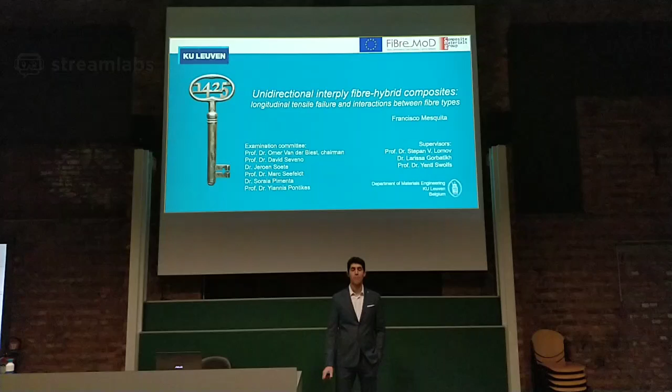But then he has to discuss about it. Yeah, but it also makes sense, because people come from different areas. You also have these clusters.

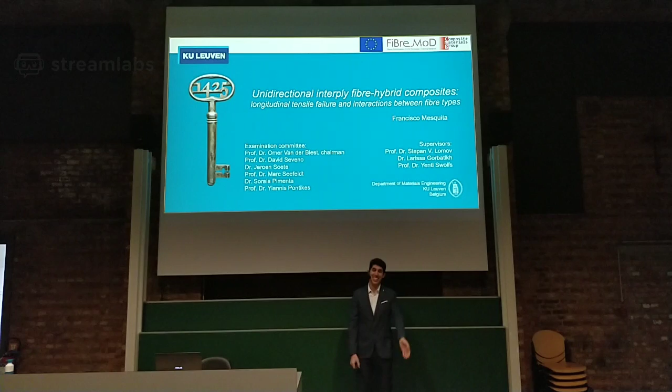Hola. Hola. Hola. Hola, we hear more of Georgia than of... Hola, Zulmira.

Because I have the video on. That's why you hear yourself.

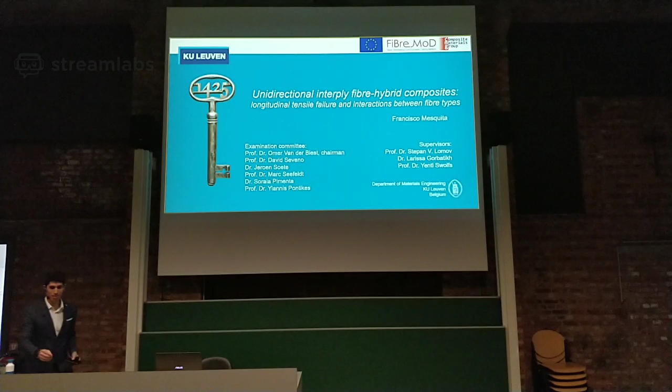What should I connect with now? No, wait.

You want to ask questions now? Did you have a lot of writing on the slides? Because I really can't read it very much. No, it's mainly images, she was in the presentation before, we said it's mainly images.

Sorry, I don't want to know what they are saying. But I imagine people are very funny.

They're complaining because they cannot wear the gowns. No, there are no gowns. People wearing the same gown. Yeah.

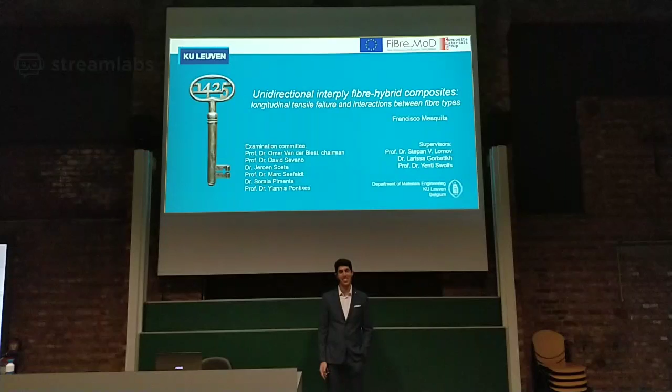I think they are coming. Yes, they are coming.

The university says 1.5 meters. I feel okay.

Maybe my friends over there can go a bit up so that there is a second row. Or we have enough space today. Okay.

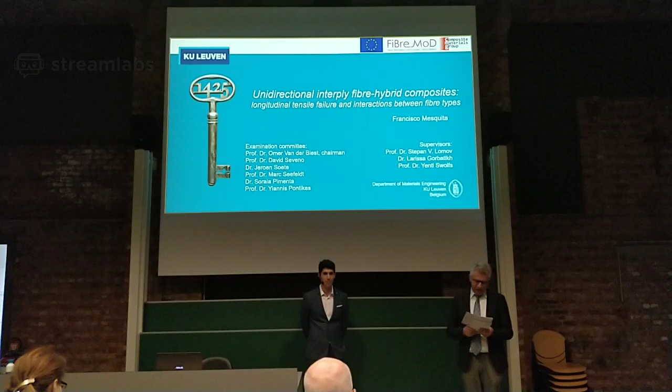I will start by explaining my thesis, but before I dive into the thesis itself, I just want to break down the words in the title: things like what are composites, unidirectional composites, interply fiber hybrids, longitudinal tensile failure, and also interactions between fiber types.

Let's start with composites. Where have you seen composites? Among other things, you've probably seen some of these wind turbines. Wind turbines actually only work if they're made of composites. If they're not, they're actually not economically viable.

Another application you may have seen on the road is the BMW i3, an electric car. This is the chassis of the BMW i3, and two people can lift it. This is only possible because it's made of carbon fiber composite. Then there are applications for sports, like bicycles made of carbon fibers, and for defense, like Kevlar vests, which are made of aramid fibers.

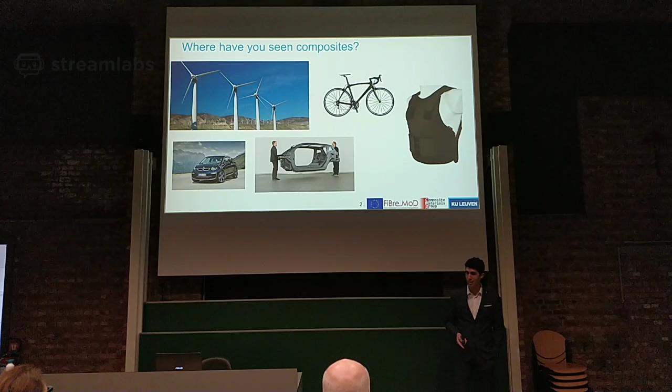But what are composite materials? Well, there are other kinds of composite materials, like concrete, or metals and ceramic composites, but here I'm going to speak about fibers and plastic. So if you take fibers and add a plastic matrix, and put everything together, there you go—you have a composite material.

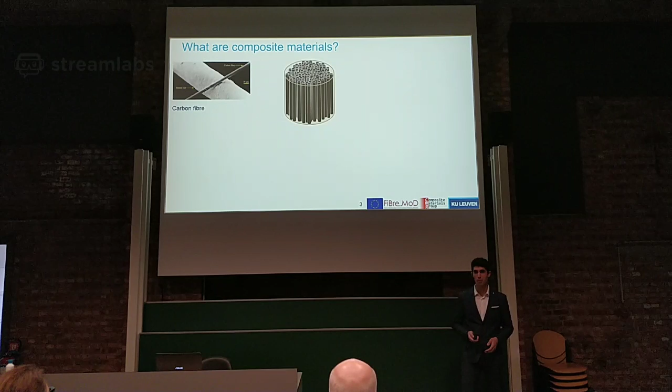Now, which kind of fibers? One of the most common types used in composites is carbon fiber, and this is the most classical image you'll ever see of it. The big thing is a human hair, and the small fiber is a carbon fiber, which is 7 micrometers in diameter. But there are also other kinds, like glass fibers or natural fibers such as flax or bamboo, which come directly from plants. So if you want a more biosustainable composite, you can use flax fibers.

And then, which kind of plastics? For example, one of the most structural resins that exists is epoxy—maybe you've seen these kinds of tables in social media or YouTube where they make beautiful rivers. But the most common things you may have seen are polypropylene bottles or polyethylene bags. So basically, if we mix the fibers with these plastics, we can get a composite material.

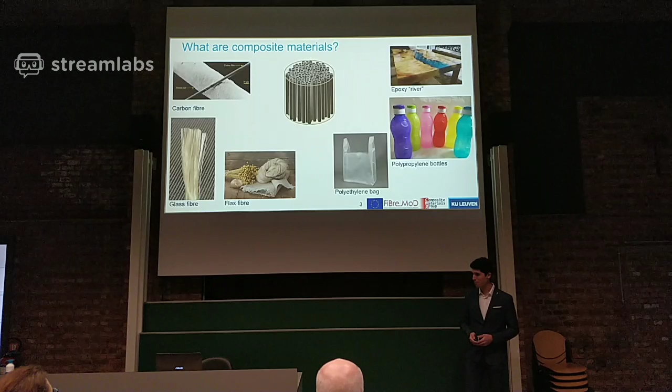Now, why do we use composites? That's what I'm trying to convince you here. If we take 7 grams worth of composite, 10 centimeters long, hold it on one side and attach 5.5 tons to it, it will deform only 1 millimeter. Of course, you can do this with other materials, such as steel, but in that case you need 20 grams, which is 3 times heavier than carbon fiber composites.

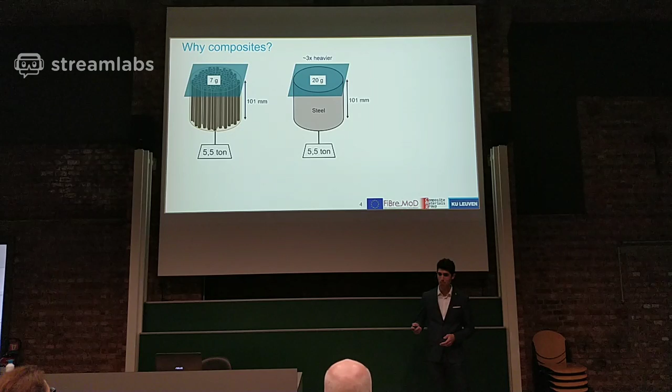So which kinds of architectures can we have in composite materials? Unidirectional composites, as in my title, are composites where all the fibers are aligned in one direction. But these are not the only kind we can have, because fibers can be oriented in multiple directions, giving a multi-directional composite. For example, the one I'm assembling here is a quasi-isotropic composite, which has almost the same properties in all directions.

But we don't have to add layers to make multi-directional composites—we can have one layer with fibers in both directions, and these are the textiles, where we can have woven, braided, or knitted composites. These are fibers arranged like our clothes, in a textile, and then we add a matrix to get a textile composite.

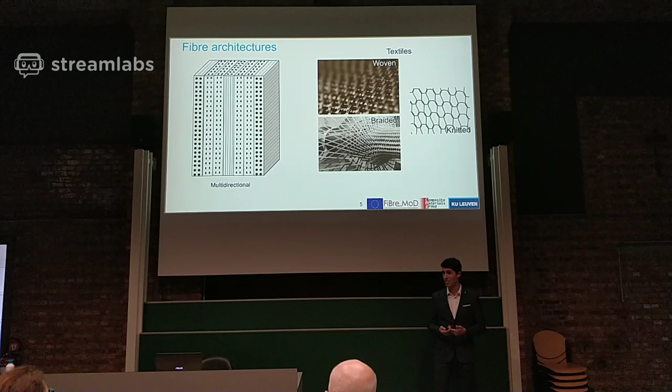Now, I'm focusing here on unidirectional composites, because in any kind of composite, the fibers that trigger the final failure in tension are the ones oriented with the loading direction. If we look at how a unidirectional composite fails—here we are loading a carbon fiber composite in tension—it will fail very explosively, very brittly, and without much warning. What's actually happening inside as we load it is that fiber breaks accumulate inside the composite, and this triggers the final failure.

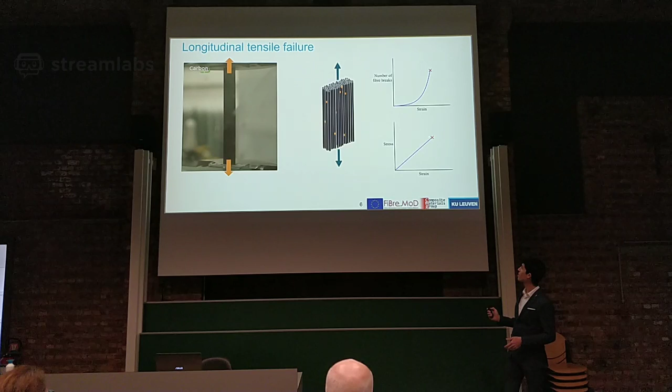Fiber breaks will start accumulating more rapidly, and at some point the composite will fail. This will also determine the stress strain diagram, which is the way we characterize materials. If we have the stiffness, which is the slope of this line, then we can also know the strength and the failure strain, and this can characterize our material very well.

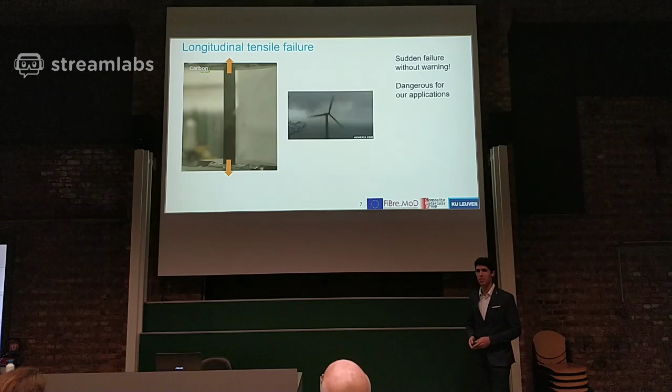Now let me give you another application where this sudden failure happens. You may have seen this before, where a wind turbine blade fails explosively without any warning. As you can imagine, this is quite dangerous for applications. So in order to avoid this, we should be able to predict better when it's going to happen, and on top of that, I would suggest adding some more safety to it.

For this, we can use hybrid composites. With hybrid composites, you actually get this pattern, which is the carbon fiber ply failing, and this pattern can serve as a warning to the final failure of the composite. So before we get something explosive like we saw here, we can actually get this nice pattern instead.

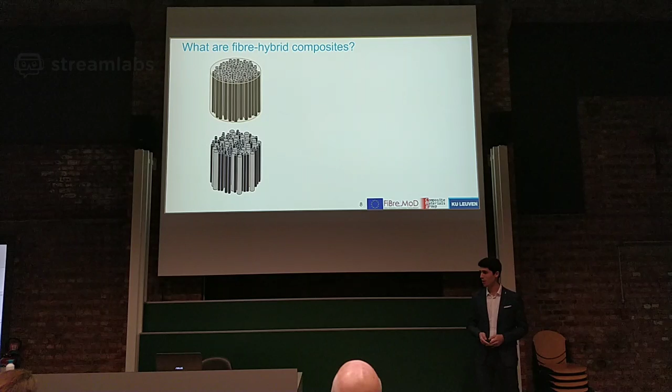But what are these hybrid composites? As I said before, if we add fibers to a matrix, then we get a composite material. But if we have at least two fiber types, normally a low elongation and a high elongation fiber, because one is more brittle and one is more ductile, and we add a matrix to it, there you go, we have a fiber hybrid composite.

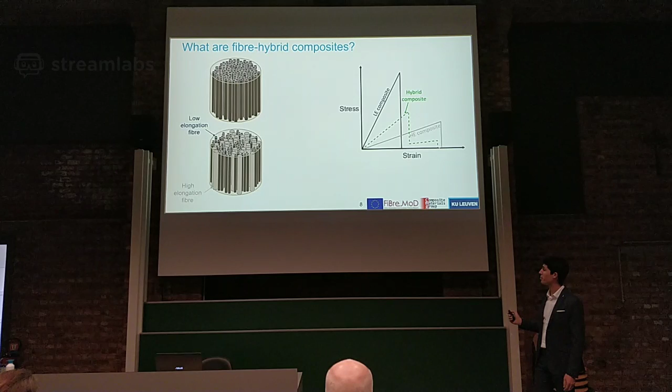The way this works is that if we look at the stress strain diagram of the hybrid composites, the low elongation composite is stiffer but also more brittle, and the high elongation composite is more compliant but also more ductile. What we get in a hybrid composite is something in the middle. So we get the failure of the low elongation fibers here, but then the composite is still able to carry load up to the failure of the high elongation fibers.

Which kinds of hybrid composites are there? The one I showed you before, also shown in this image, is an intra-yarn hybrid composite, where all the fibers are mixed very well, very closely, in the same bundle. But we can also mix them in bundles in the same layer, so the fibers are dispersed in bundles. Or lastly, we can have interply hybrid composites, in which each ply corresponds to one fiber type.

Now, I've decided to focus in my thesis on this type of hybrid composite because it's easier to manufacture. You just put different layers of different materials on top of each other, and there you go, you get an interply hybrid composite. Since this is so easy to manufacture, it's quite relevant for industrial applications.

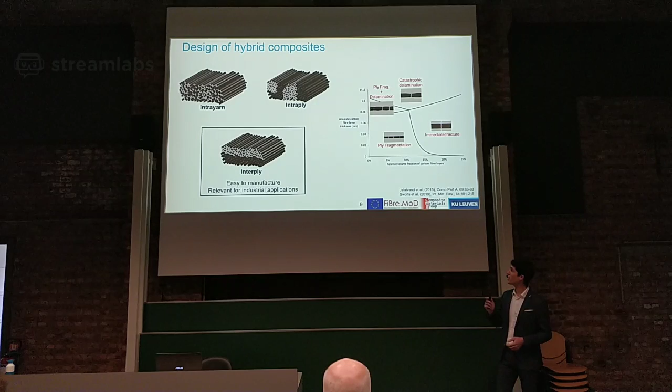Another reason is that if we look at this diagram, we can actually obtain different failure mechanisms just by combining different fractions and thicknesses of materials. Looking further, what we see here is the relative fraction of carbon fibers on the horizontal axis and the thickness of the carbon layer on the vertical axis.

With this image, we can see that by changing the configuration of our hybrid composite, we can obtain ply fragmentation, which is the failure mode you saw before in the video. Or, if you have too much carbon fiber, you can get immediate fracture because everything fails at the same time and the glass fibers cannot sustain the loads. But if the carbon ply is quite thick, then the plies will detach from each other.

If you look closely at this diagram, you'll realize that as we go right on the horizontal axis, we are adding more carbon fibers and less glass, making the composite stiffer. And going down on the vertical axis, we are decreasing the thickness of the layers, making the composite lighter. So we want to push against this line to optimize the performance of our hybrid composite, but we don't want to go over it, otherwise we enter the region of immediate fracture, and that's not good. So what we want is to predict the longitudinal tensile failure of fiber hybrid composites, so we can go very close to that line but not go over it.

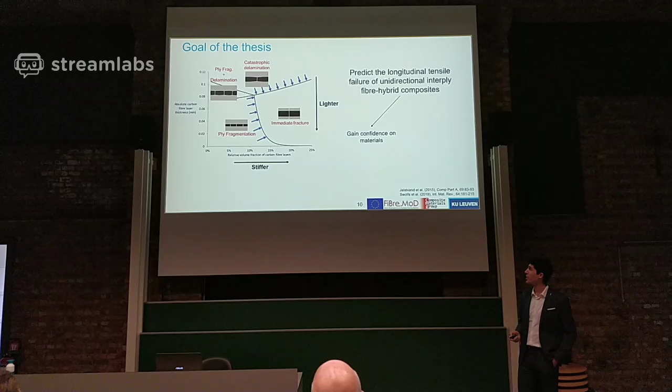By doing this, we can gain confidence in the materials. But I don't only want to do that - I also want to connect the micro-level fiber and matrix properties to the meso-level failure modes of ply fragmentation, immediate fracture, and delamination.

So let's establish a roadmap. The goal is to develop a model. As I told you before, when we load the composite in tension, what we start to get here are fiber breaks. So in order to predict these fiber breaks, the first thing we need to know is how to get the fiber properties.

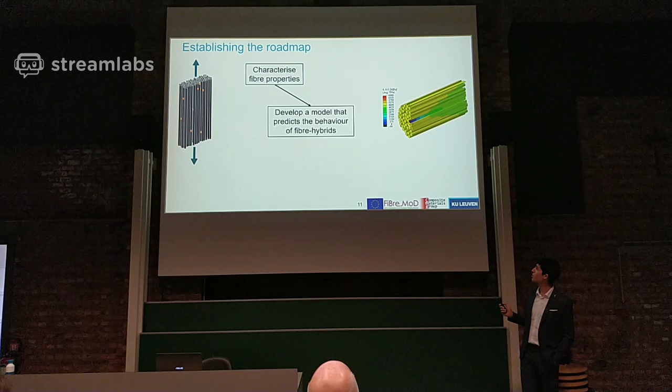So let's start by characterizing the fiber properties. One thing I didn't tell you is that apart from fiber breaks happening just because of the fiber strength itself, they also happen because when fiber breaks occur, they create stress concentrations around them. So other fibers carry extra loads, and we need to understand how that happens—like the broken fiber in the middle here, with the surrounding fibers having stress concentrations. So the second step is to understand how these stress concentrations occur.

Finally, our model is not really useful if we have not validated it against experimental results. So the final step in this research is to validate the model. I want to do this not only against the stress-strain behavior, which is a global behavior, but also look inside the composite and compare the damage mechanisms occurring inside.

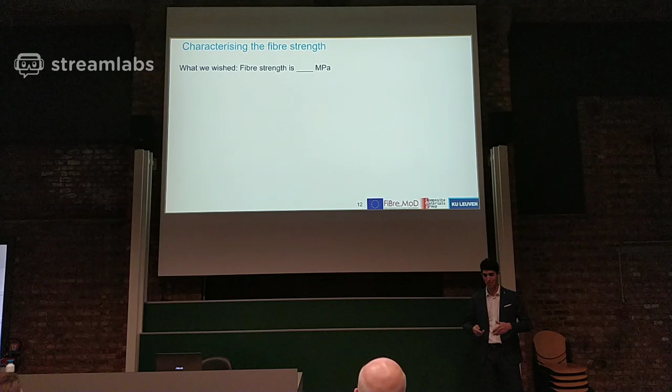Starting with the characterization of fiber properties, what we would wish is that the fiber strength is a single value—let's say 10, 100, 1000, 10,000 megapascal. But in reality it's not like this. Fiber strength is stochastic, meaning it's random but obeys a probability distribution.

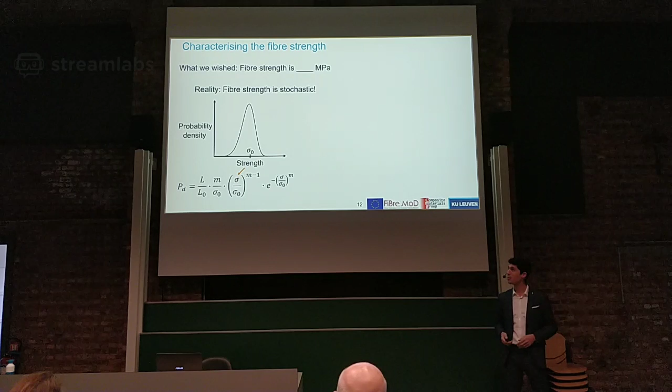This distribution is characterized by an equation—I know you don't like equations much, but simply, this is the strength, our independent variable on the x-axis, and sigma 0 is the scale parameter. It represents the value at 63% probability of the probability density distribution. So if you change this, you move the probability distribution left or right. Then you have the modulus, which controls the variability—higher modulus means less variability in the fiber strength.

Fiber strength is stochastic because it's determined by defects inside the fiber. Due to manufacturing, there are very small defects at the nano or micro level, and these determine the failure of the fiber. That's why we have a probability distribution. If we make the fiber longer, it's more likely there's a defect inside that will trigger its failure—so this also depends on the fiber length.

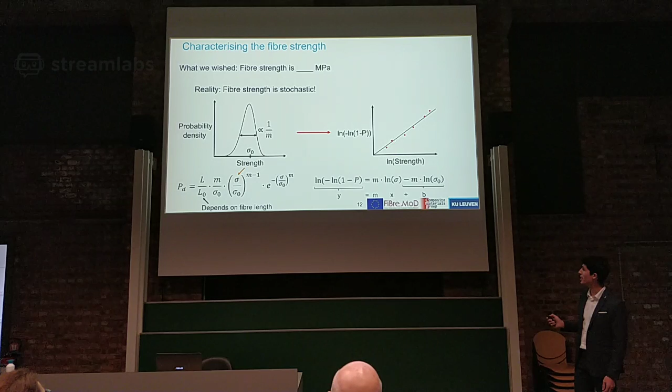If you do some mathematical arrangement and apply logarithms, we can convert this probability distribution into a line. We characterize this by plotting data points. I removed the length parameter because normally we do this for one specific length. If this equation seems complicated, it's actually just a line equation, y equals mx plus b. Once we have these data points, it's quite simple. The problem is getting these data points.

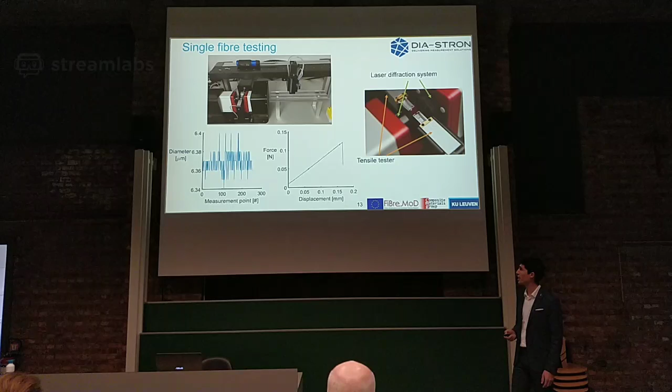So let's do that. What I did here was partner with Dia-Stron, who have automated single fiber testing machines. This is the core of the equipment, where they have a laser diffraction system to measure the fiber diameter at multiple points, and averaging this gives a very reliable measurement of the fiber diameter. They also have a tensile tester, which gives us the force and displacement diagram, and with some data processing we get the strength and stiffness of the fiber.

Now stiffness isn't a unique parameter in carbon fibers because they actually stiffen with applied strain. If you measure stiffness between 0.1% and 0.3% strain, you get a certain value, but if we move that range further and further, we can measure stiffness as a function of applied strain. When we do this, we get a diagram we can fit a line to, giving us the gradient of stiffness—how much stiffness increases with applied strain—and the initial stiffness, or at least an approximation of it.

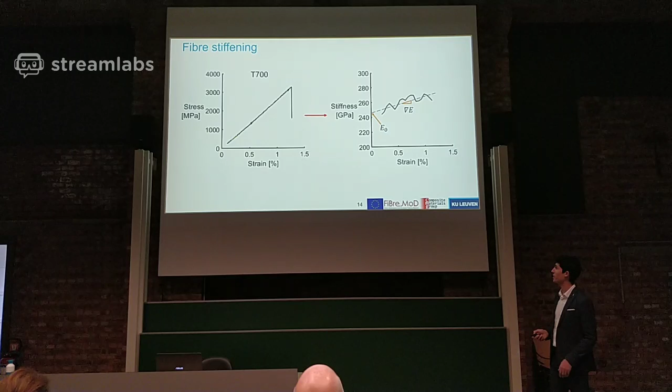I did this since I'm talking about hybrid composites, so I'm not going to do this just for one fiber type. I actually tested 5 different fiber types: 4 of them are carbon fibers, and 1 is glass.

The reason I did this is because 2 of the fibers, the T700 and 34700, have the same stiffness and tensile strength according to the manufacturer. I wanted to compare these 2 fiber types, see how their probability distributions look, and understand how this may influence composite properties. Then I also tested the T300, which had similar stiffness to the previous 2, but a lower strength. Let's see how that influences the Weibull parameters.

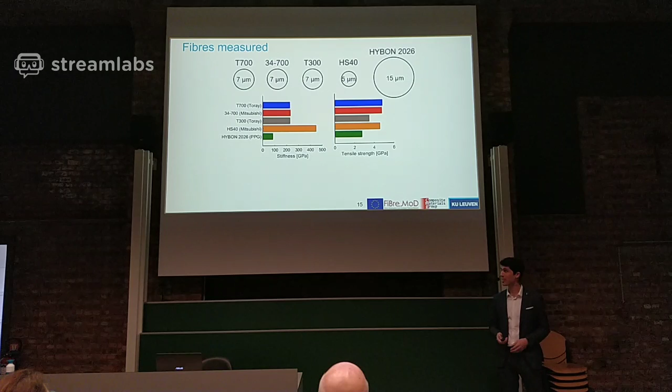And the HS40 fiber, which has almost twice the stiffness, but the same tensile strength. Since most of my hybrid composites will be with carbon and glass, I also tested this glass fiber, which has lower stiffness than the carbon fibers, but not so different strength because it's also more ductile.

And then I did a very high number of tests. If you add all of these up, it gets to almost 700 single fiber tests. That's 700 times putting fibers in a cassette, plus extras for calibration, which I'm not even counting here. So first, let's look at the fiber stiffness and stiffening of the carbon fibers.

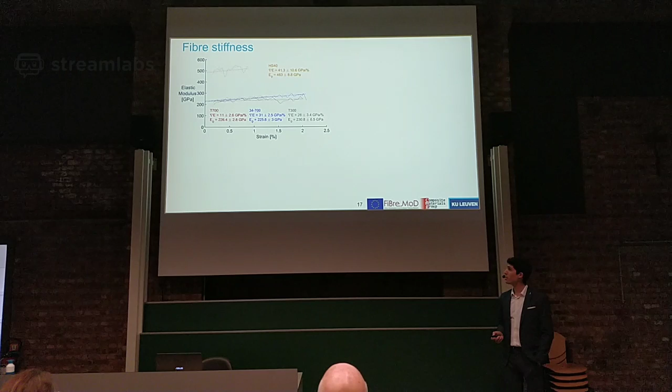When we look at the HS40 fiber, yes, it stiffens a bit faster than the others, but the most unexpected result is that its initial stiffness was too high compared to the datasheet value from the manufacturer, and we were not expecting this.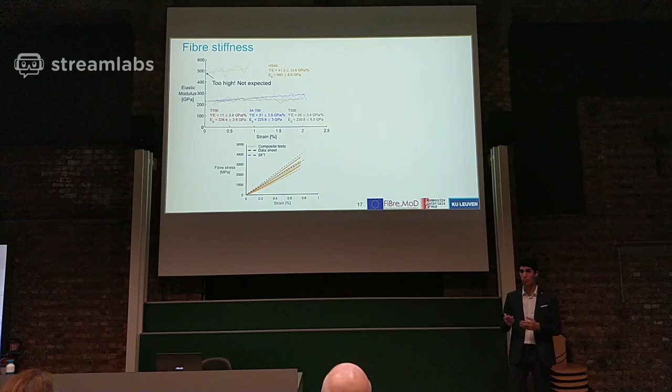But fibers in composites are not always perfectly aligned with the loading direction. They have some misalignment, some waviness, some angle relative to the loading direction. So it's possible that the value we measure with a single fiber test is a bit higher than the value obtained through composite tests, and that this is actually real, because with some misalignment, the stiffness measured from the composite is a bit lower. It seems that when the manufacturer measured stiffness, they measured it like we did with composite tests, obtaining a certain value, but the real stiffness of the fiber is a bit higher.

When we look at the glass fibers, we find something remarkable. Although the carbon fibers stiffen with applied strain, the opposite happens with the glass fibers — the stiffness actually decreases with applied strain. This is remarkable and has not been observed yet in the literature. We think, although we're not 100% sure, that it's because the silicon and oxygen atoms in the glass fiber get a bit further apart as we stretch the fiber, which reduces the bond energy and therefore the stiffness decreases. Again, to be confirmed — we're not sure, but it's our hypothesis.

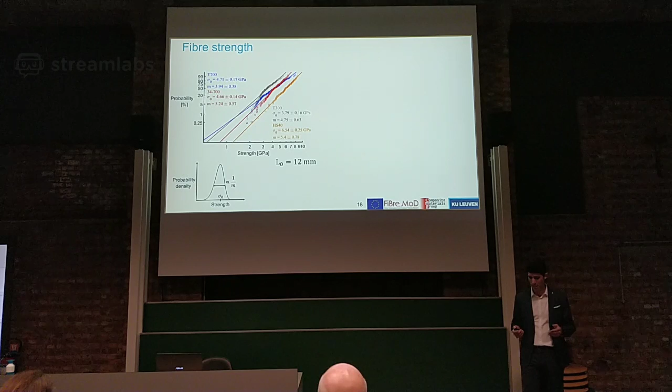Then, looking at strength, the most important comparison was between the T700 and 34700 fibers — the blue and red lines here. As you see, the sigma zero, the scale parameter, is quite similar between the two fibers, but the modulus is not the same. This means the variability of strength is not the same between the T700 and the 34700, and this may have consequences for the composite properties.

Now, when I said that we needed a lot of tests to properly characterize the Weibull parameters, I didn't tell you how many.

It's very difficult to say how many tests we need exactly. But what I did here was take a sample, for example, of 50 points out of my 217 data points for the T700 carbon fiber, and for each set of 50 fibers, I fitted Weibull parameters.

If we do this enough number of times, we can fit an ellipse to encase all these estimations. If we have a low number of fibers, we get a very big scatter in the parameters, but as we increase the number of fibers in our sample, this ellipse shrinks until we get a focal point, which is the value I obtained with the 200 tests.

So this is to say that we should not use only 50 tests to characterize the fiber strength, at least for the T700, because we get a very big scatter on the parameters. I cannot say how many we need, but definitely a very high number.

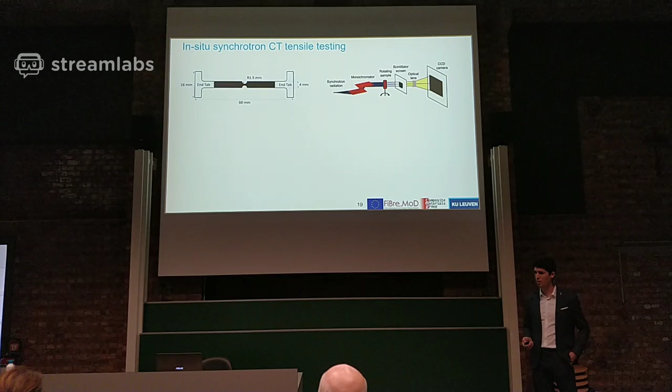We scanned the notch region, where the composite will fail and accumulate more fiber breaks, and we were looking for the fiber breaks. Doing this, we can correlate the stress applied in the composite with the accumulation of fiber breaks, and we can separate the fiber breaks that happen only due to the strength of the fiber from the ones that occur due to stress concentrations.

So when we do this, we can estimate the Weibull parameters using a virtual bundle with assumed Weibull parameters. Before we compare with a single fiber test, which is our benchmark, I need to scale the Weibull parameters estimated through the composite that we imaged, only 1.7 millimeters, up to the length of the fibers in the single fiber test, which was 12 millimeters.

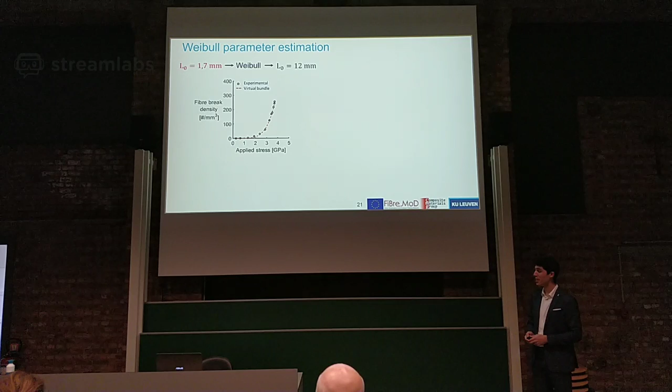When we compare for the T700 carbon fiber, we see that the estimation using the CT actually gives us quite decent estimations. For one specimen, it was quite spot on. For the other one, slightly lower, but still within the scatter.

But when we look at the estimation for the glass fibers, this didn't go so well. I think the problem is not the method itself, it was the specimens that we had with this fiber type. Since glass fibers are a bit bigger, we had fewer of these fibers in our composite, and therefore we didn't have enough statistical power to properly predict the parameters.

So next time, and I hope we can do this later in the year, we'll take bigger samples and be able to check whether this is a problem or not. So, we finally managed to characterize the fiber properties. Let's go to the second part and try to understand stress concentrations.

So what are stress concentrations, and are they important? Let me show you this image where we have 4 states in our composite. An initial state where all fibers are intact, and if we apply a load, all the fibers are carrying the same load. But at some point, due to the stochastic nature of fiber strength, one of the fibers will break.

When this happens, due to the matrix, the fiber will still recover its stress a bit farther away, but the fibers nearby will have to take over the stresses that the broken fiber was carrying before. So these nearby fibers are more likely to fail. If we increase the strain a bit, or even just like that, nearby fibers can fail just because of these stress concentrations. This will accelerate the process of composite failure and lead to final failure.

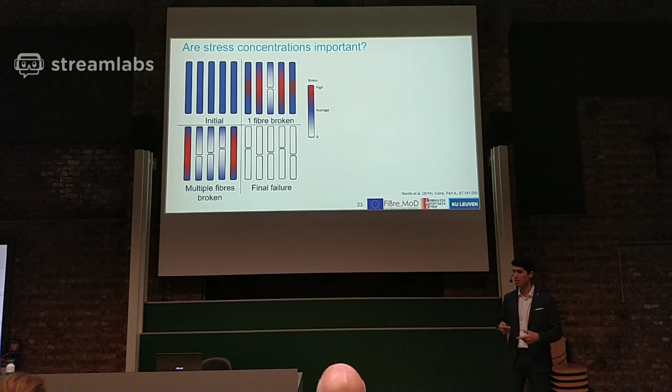Now in hybrid composites, as I've shown you before, we have different failure mechanisms such as ply fractures or catastrophic delamination. So we're not only interested in stress concentrations due to fiber breaks, but also due to ply fractures. I'm going to investigate stress concentrations due to fiber breaks, but also at the higher level with ply fractures and some delamination.

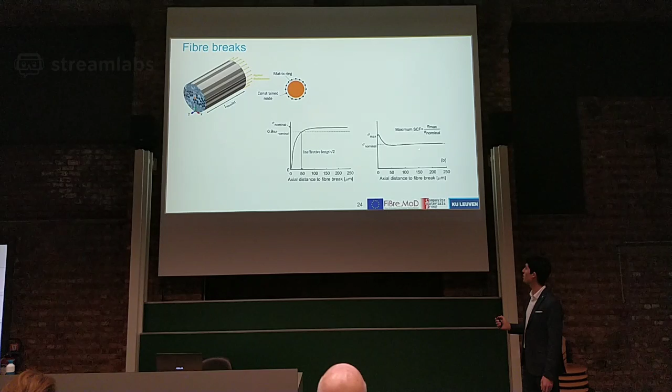But I tried something else. I looked at the local arrangement of the fibers and tried to look at the local volume fraction. This local volume fraction is basically the distance between the broken fiber, the reference fiber, and the fibers nearby.

Here, indeed, I found a very big correlation between the ineffective length and the local volume fraction, which means that this local volume fraction affects the ineffective length and the stress recovery of the broken fibers much more than the distance to the ply interface.

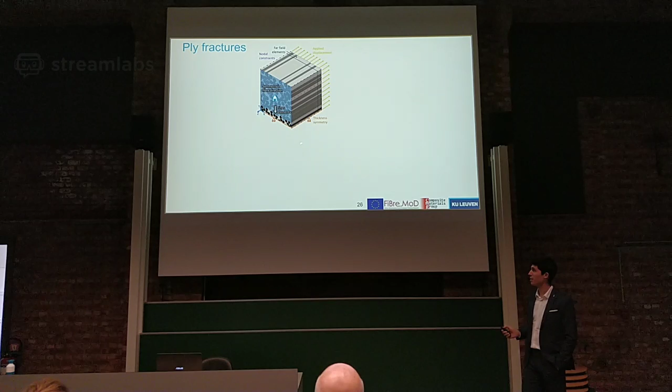Looking at the higher level ply fractures, I created a new model, and it works more or less the same as the previous one, where we apply displacement on one side, but in this case we hold only the intact layer, and we release the broken layer. So this broken layer will be simulated here.

I did this for three different composites with varying thicknesses of the broken layer. When I looked at the ineffective length, I found that it depends very much on the thickness of the broken layer, and that the ineffective length is much higher in the ply fractures compared to the single fiber breaks, which is this smaller value over there.

This means that the stress recovery in the ply fractures occurs at a much larger scale compared to the single fiber breaks. Looking at the maximum stress concentrations, again, stress concentrations due to ply fractures are much higher compared to single fiber breaks, and they also depend on the thickness of the broken layer.

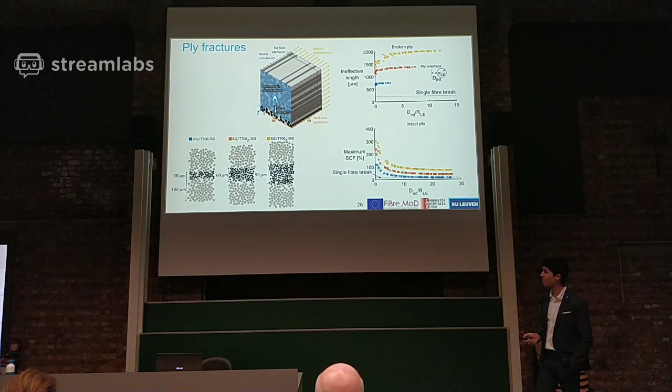Finally, I also looked at the delamination. Delamination, by the way, is when you have a ply fracture, so the ply fails in the middle, and then the layers debond from each other.

I created this model which has exactly that property. So again, we hold the intact layer, we apply displacement on the other side, but now this face, the red face over there, can slide, so the layers can slide on each other.

I ran some simulations with three different delamination lengths, and I wanted to see what is the effect of the delamination length on these stress concentrations. Looking at that fiber, which is close to the ply interface, what we observe here is that the maximum stress concentration actually decreases as the delamination length increases.

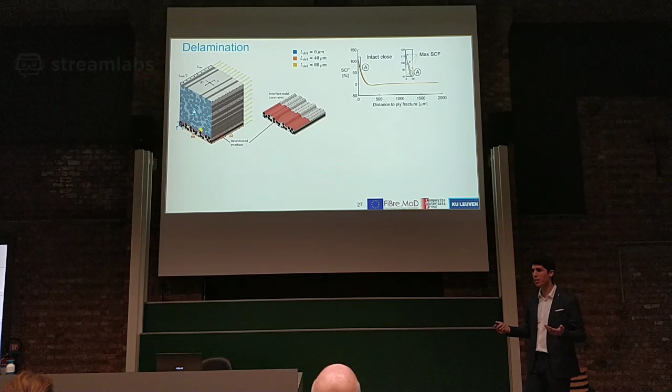This is not really because the fiber is less affected, but it's because the stress concentrations become more uniform through the thickness. If we look at the fiber that is a bit farther away, the opposite happens: it has a higher maximum stress concentration that is increasing with the delamination length.

Okay, so two steps are done. We characterized the fiber properties and understood something about stress concentrations. So let's start developing our model.

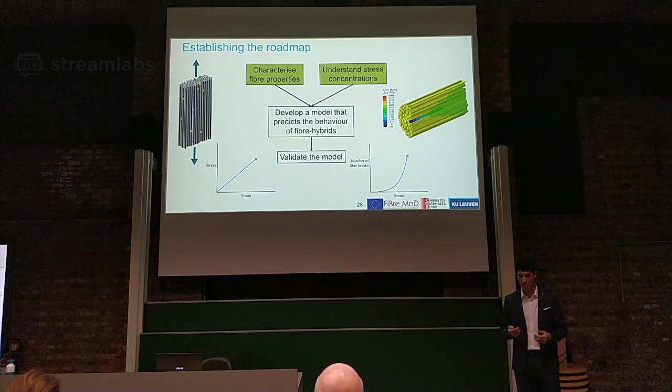The way this model works is that we have all the fibers parallel to each other and with the loading direction. In order to take into account the stochastic fiber strength, we divide each fiber into small elements like that, so each element will have a random strength according to the Weibull distributions.

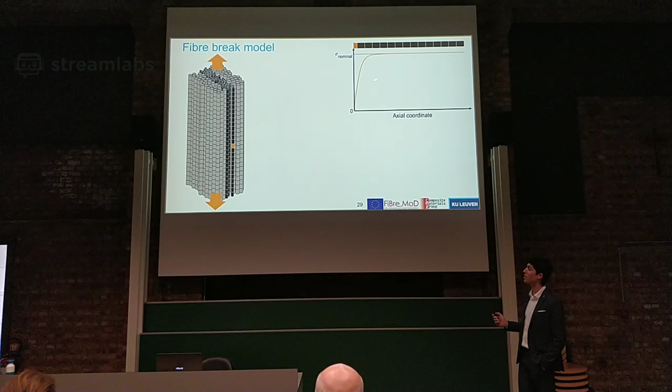When we start applying load, we see that at some point we will have fiber breaks, because the weakest fiber of all will start failing. To this fiber we'll apply a stress recovery profile as obtained from the finite element models.

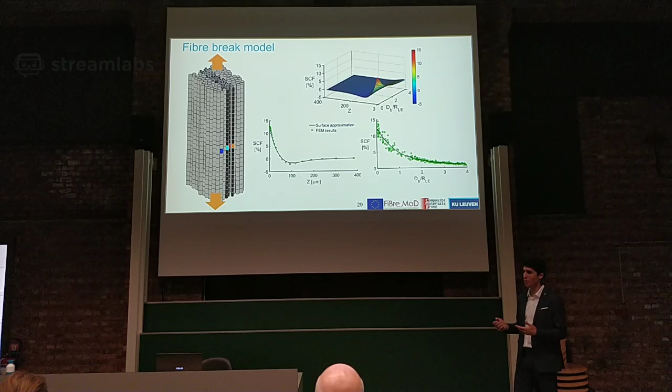Now, the fibers that are nearby will have stress concentrations, and the way we take this into account is that we get the data from the finite element models and pass it through this surface approximation, which has dimensions in the radial direction, so distance from fiber to fiber, but also in the axial direction, distance along the fiber. Using the data from the finite element model, we get this surface approximation where we find the average stress concentration. We don't take into account the big scatter, we just follow the average value, because we don't know well enough how to predict this scatter yet.

So allow me to rotate this model for you and remove these glass layers, because I want to show you how we model ply fracture.

Fiber breaks will start accumulating, but at some point this ply will fracture. Let's consider that we are at that stage and we have one fiber break. But due to the stress concentrations only, without increasing the strain, these two fibers that have the stress concentrations can fail. So in the second iteration, we get three fiber breaks.

Now the stress concentrations are even higher, so in the third iteration we get more and more fiber breaks. At this point, we can say the number of fiber breaks is increasing rapidly enough for us to say this ply will fracture there.

But we don't want to continue the model to calculate which fibers will fail next based on the stress concentrations. We want to actually predict this, because that is much more computationally cheap. So we look into the elements of the fibers that are not broken yet, and we calculate this failure index, which is basically the stress applied over the strength.

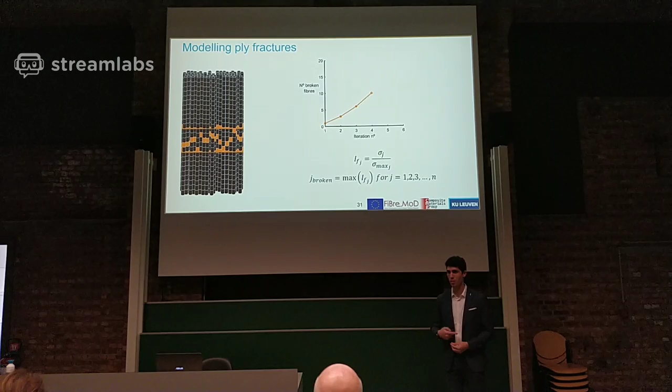This gives us the probability of each fiber element to break, and the one that breaks is the one with the maximum failure index. So we can calculate the morphology of this ply fracture without letting the model continue and consume computational resources.

So if we look at the influence of the Weibull parameters of the S-glass fibers on the composite properties, I did this for two stacking sequences. I maintained the parameters of the carbon fibers and changed the Weibull scale parameter of the glass fibers. When I did this, I was able to change the failure mechanism.

Which failure mechanism? Let me remind you. If we apply tension and everything fails immediately, we get immediate fracture. If when the glass ply fails we already have some fractures, we can call it multiple fracture. But if we're at the point that the carbon ply has so many fractures that it cannot fracture again...

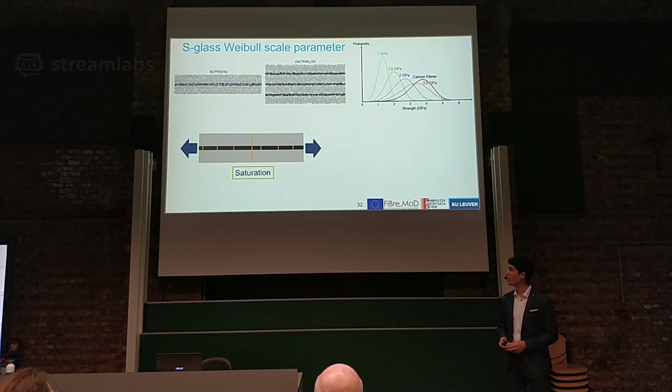...then we call this saturation. For the other kind of composite with multiple carbon plies, we can have an intermediate step where some plies are saturated and some only have a few fractures, and we call this partial saturation.

The result of all this study ends up in this diagram, and this is a probability diagram because each of these bars corresponds to 100 simulations. When we run the simulations with each set of parameters, we count how many times immediate fracture happened, saturation, and multiple fractures, and we get this probability map.

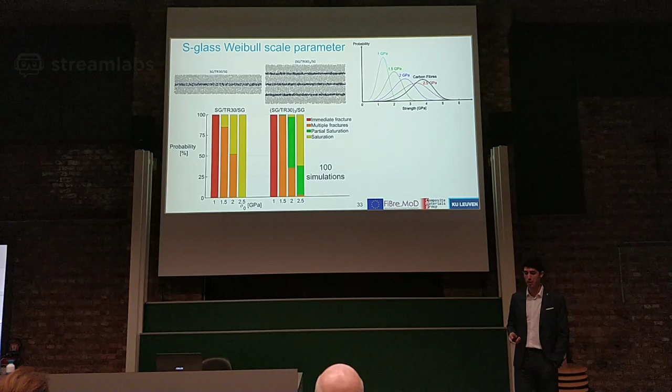What you see here is that when the glass fibers are too weak, we always get immediate fracture on the left side. But as they get stronger and stronger, we start coming into modes of multiple fractures and finally saturation. All of this means that even with the same set of parameters, due to the random nature of the fibers and their strength, we can get multiple failure modes.

So coming back to this diagram, this hard line that is here between ply fragmentation and immediate fracture is actually not a hard line, but rather a probability distribution, a probability transition.

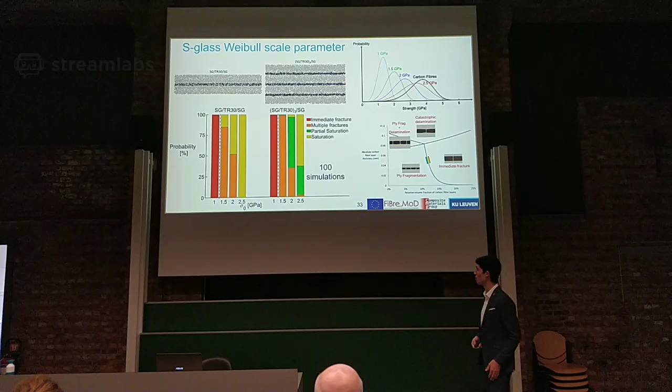Next, let's talk about delamination and how we model it. Looking closer, the stress at the ply fracture surface is zero, but the stress in the glass fibers is higher. There is stress on these fibers, so we get a shear stress, and stresses build up in the interface, which can cause delamination. So how do we deal with this?

If we consider a delaminated surface of length A, and we want to check whether this delamination will increase by an increment delta A, we check this equation. It seems complicated, but it just means that if the energy dissipated by the increase of delamination is higher than the energy necessary to create the surface, then this will occur, because the composite tries to reach the lowest energy state possible.

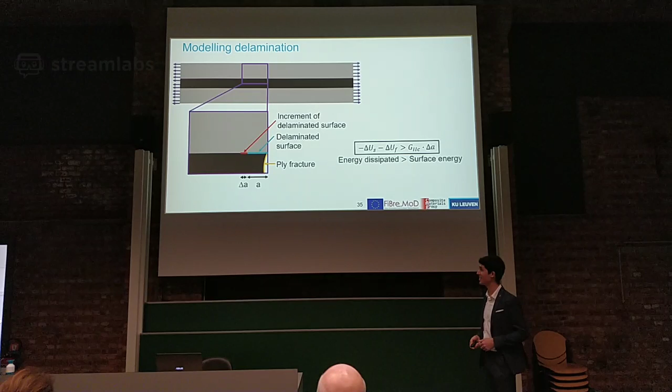So how do fiber breaks influence any of this? Well, in the equation I showed before, without any influence of fiber breaks, nothing says that the delamination length on the left side and the right side of the ply fracture needs to be the same. But in our experimental observations, we don't see this. We see that one side is typically larger than the other, and one explanation is the presence of fiber breaks.

If we go back to this equation, US is the strain energy, the energy contained in the fibers that they release when they break or when the delamination length increases. If we already have fiber breaks, they've already released some of that energy, so there's less energy left to release. The delamination will not increase as much on the side that has more fiber breaks compared to the side with fewer fiber breaks.

So in a simple study comparing the presence of fiber breaks versus no fiber breaks, we immediately see that when we have fiber breaks, the initial delamination length, which occurs immediately when the ply fracture happens, is smaller than in the case without fiber breaks. This is again because there's less energy to dissipate, so the delamination length doesn't increase as much.

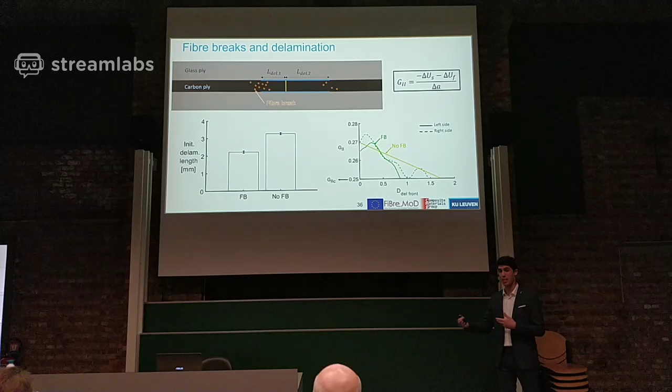Now, if we invert that equation, we can also get the energy release rate, G2. This is affected by the energy release controlled by the fiber breaks and by the material's energy, but also by friction. This is why the energy release rate decreases with increasing delamination length: there's more frictional buildup, and therefore more energy goes into friction.

What I want to compare here is the case of no fiber breaks against the case with fiber breaks. Without fiber breaks, the energy release rate decreases, but there's no difference between the left and right side, so the delamination is always symmetric. But when we do have fiber breaks, things are more complicated: the energy release rate on both sides is different, resulting in a natural asymmetry of the delamination length due only to the presence of fiber breaks.

Now, this horizontal line on this graph basically defines whether the composite will delaminate or not, and this depends a lot on the energy of the interface, the energy needed to break it. If we change this critical energy release rate, we can change this line and make delamination more or less likely. I varied it from 0.1 to 1 Newton per millimeter, and indeed obtained different failure mechanisms.

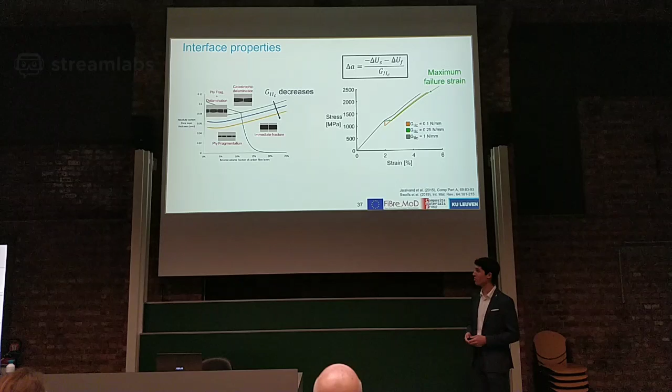For example, the dark green line is a failure mechanism of ply fragmentation. The orange one is catastrophic delamination, and the intermediate green curve is ply fragmentation plus delamination. The most interesting result is that we maximize the failure strain not with the lowest or highest critical energy release rate, but with an intermediate value, giving us a way to optimize the failure strain using the strength of the interface.

Okay, so I showed you what we can do with our model. Let's check whether it actually works to predict the strength of composites. We go back to the synchrotron, where we do volumetric images of our composites, and we tested a cross-ply composite with fibers aligned with the loading direction, surrounded by fibers in the 90-degree orientation.

We do this just to keep the composite from splitting, or to avoid some of the splitting. I tested not only carbon fiber composite, but also two hybrid composites with different configurations. The white ones are the glass fibers, and the more gray ones are the carbon fibers.

If we compare the experimental stress strain diagram with the modeling that we did, we see that we are capturing the stiffness quite well, not very difficult, but we are failing quite a lot on the failure strain and strength of our composites. But this diagram doesn't tell us much more than that. We are failing, but what is going wrong? What's not being done properly?

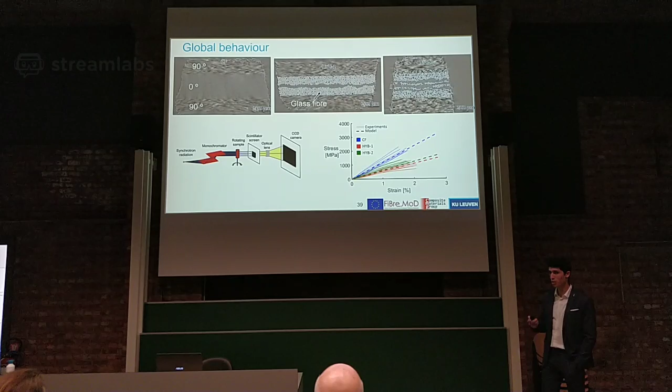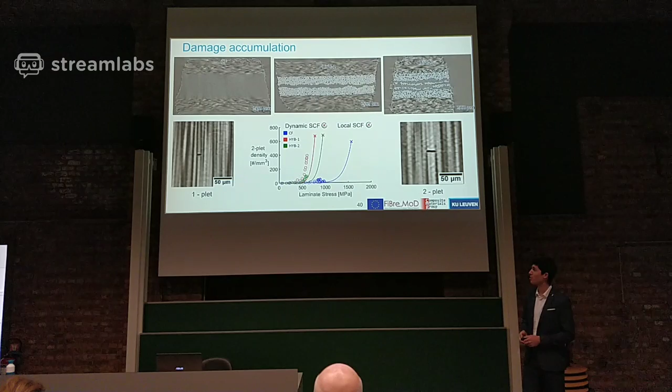But if we look at the 2-plet density, here things are not so great. This means we are not capturing well the stress concentrations, but not the static stress concentrations I've shown you before. I think what we are missing here are dynamic stress concentrations and also local stress concentrations - other kinds of stress concentrations that occur when the fiber breaks, very local, meaning in a certain region of the fibers. So this is what we need to improve to get better predictions of composite strength.

Now, the last thing I want to talk about is the hybrid effect. I showed you this image before, where we have the stress strain curve of our hybrid composite, and it's not really a coincidence that the first load drop in the hybrid composite occurs at a higher strain compared to the low elongation composite. It's actually called the hybrid effect.

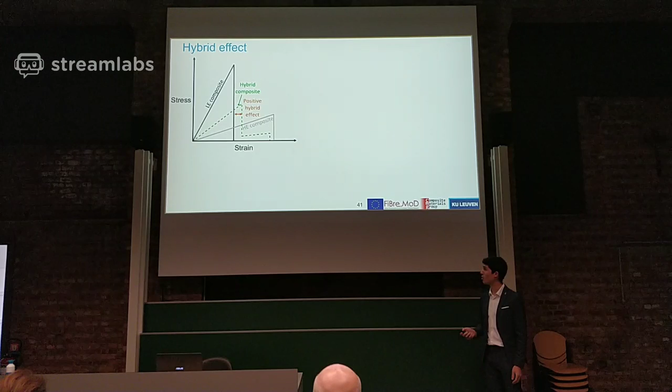This hybrid effect occurs due to three main hypotheses. The thermal residual strains, because fibers have different thermal expansion properties - so when we add two different fiber types, one will contract more, the other will expand more, and therefore we get residual strains. Dynamic stresses, stresses that are released at the moment of the fiber break, in hybrid composites actually cancel each other a bit. And the interactions between fibers, which is what we actually capture in our model.

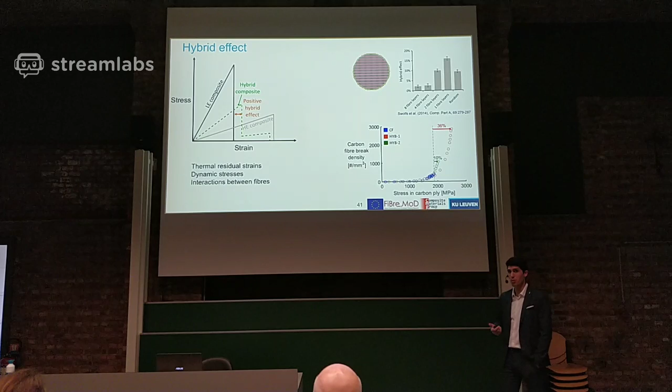Now, there was a study before my PhD on the influence of the thickness of the different layers on the hybrid effect, and it was shown that the thinner the layers were, the higher the hybrid effect was. This is exactly what we observe in our experiments. The thinner the composite, so the hybrid one with the thinnest carbon layer, the carbon fiber break density is able to be much higher, so the composite can accumulate much more damage compared to the reference carbon fiber composite and the one with more layers that can interact with each other. This is experimental evidence supporting the role of fiber breaks in failure development that we had not seen before.

Now, there was something interesting I observed when analyzing the data - the fiber breaks seem to occur closer to the ply interface almost all the time. But I was not sure whether this was just me looking more into these fibers, or if this was really something that was happening.

So I went ahead and calculated the distance between each fiber break and the ply interface. And when I did this, I noticed that indeed it's more likely that fiber breaks will occur close to the ply interface than farther away from it.

This gives us some supporting information to the hybrid effect, because if we have a low elongation fiber composite with one fiber break in the middle, surrounded by only fibers of the same type, and we want to check whether the other fibers will break or not, it's likely that any of these 6 fibers will break because they have more or less the same failure strength, so one of them is likely to fail.

But in a hybrid composite, especially if the fiber breaks occur more likely near the ply interface, in this case it's less likely that a new fiber break will occur because there are fewer fiber breaks. So this is again some amplification effect due to the fact that we have weaker fibers near the ply interface compared to the middle of the plies.

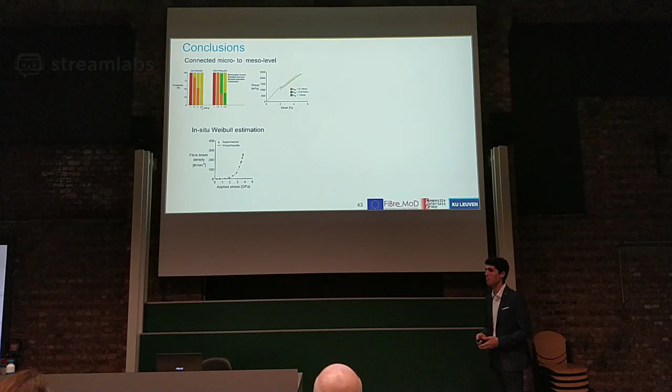So finally, just to conclude, we were able here to connect the micro to the meso level. We were able to connect the properties of the fibers, the scale, and the interfaces to the failure mechanisms of hybrid composites. I also developed a new method to estimate the Weibull parameters, not doing 200 single fiber tests, but just by doing one composite test.

Created new models to predict SCFs, and also got some more understanding on the underlying mechanism of the hybrid effect.

Of course, most PhD theses don't close themselves, so there's still some work to be done. For example, the finite element model that I showed you to predict the stress concentrations near the lamination is not really perfect. There are some things that need to be worked out to make it work all the time.

Also, capturing dynamic effects and local stress concentration is really important to predict the strength of our composites, as I showed you before. And I think our model can be extended to this intraply dispersion. Using these 3 goals of future work, I think this can work together to predict the strength of any kind of fiber hybrid.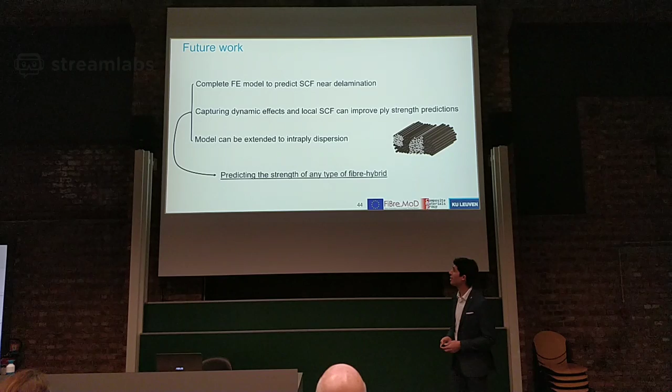Thank you very much, Francisco, for this very clear presentation. Thanks. And then there is time for discussion.

Yes, but this is something happening on a very small scale. It's not something that you can use in real-life applications, or correct me if I'm wrong. Well, what you see there is actually the carbon plies breaking, that's why you get this pattern. So if we have an application at even larger scale with the same stacking sequence and the same loading condition of tension - though it's rare that we have only pure tension in the composite - I would not see any reason why this wouldn't happen even in a larger structure.

Would you have a way to monitor it? I mean, is it really a warning system? Yes, I think so. If we have some way of getting an image every minute or seconds, and with a nice algorithm you can actually detect the pattern, then I think there can be a warning sign to whoever is in charge to go and say this needs to be replaced.

Thank you very much, and congratulations. Thanks. Thank you, Jeroen. Yes.

He said it already, it's a nice work. I mean, we said it before, but also the presentation - I've been asking myself if I understood more this time than the previous time. But I think that's a good sign that both the presentation and perhaps my evolution of the topic have been positive. So no more congratulations, let me ask a few questions.

We think of kinetics. So kinetics were not taken into account here, but they would play a big role, not only on this, but actually on the dynamic stress concentrations. There's where kinetics actually do play a big role, on the wave of the delamination propagating.

And how this affects, in our model we do things in a static way, different delamination lengths, but still static. So for sure there are effects there, but I think that's the next step. Our model for delamination was already quite heavy and difficult to run, so adding dynamics on top of that in the next few years, hopefully.

I was lying, last one, I swear. Okay. Weibull, for me, Weibull is kind of standard. If you do ceramics, you do concrete.

People get away with composites to do Weibull distributions. Isn't that standard? Maybe in every composite, or is it a standard way of measuring? And nothing extraordinary, like trivial. Is it extraordinary in composites to do Weibull distributions?

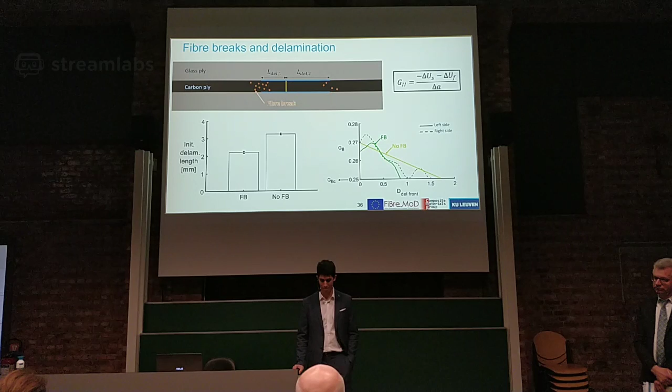The first one is about the scales you have investigated. So basically, you look at the fiber scale, the micro scale, and then let's say the ply scale. I think we can associate this ply scale to the macro scale. And this is quite okay when you have UD, but as you have one slide illustrating, we have also a woven or braided textile, and then there is an extra scale coming in between the micro scale and the macro scale, which is the meso scale, so the tow scale or the yarn scale.

So how far are you, let's say, to add this mesoscale into your models? Is it something that is of interest? Is it something that would be compatible with the already established modeling framework?

Or do you need to start from scratch again to include the micro, meso, or macro scale? Can you hear me well? Okay, so if I may ask again, your question is about adding a macro scale on top of the meso scale that we already have here. Okay, so can you please mute your microphone for a second? I'm hearing myself. Thank you.

Okay, so the way I think this would work is that we are predicting now the strength of a meso level bundle, indeed. But I think once we know the strength and the variability of strength and other parameters, like stiffness, like failure strain, of our mesoscale level, I think we can input this into a finite element model, which is a macro scale, and adding some of this into such model, I think that would bring us to the next scale. Now I'm done with my answer.

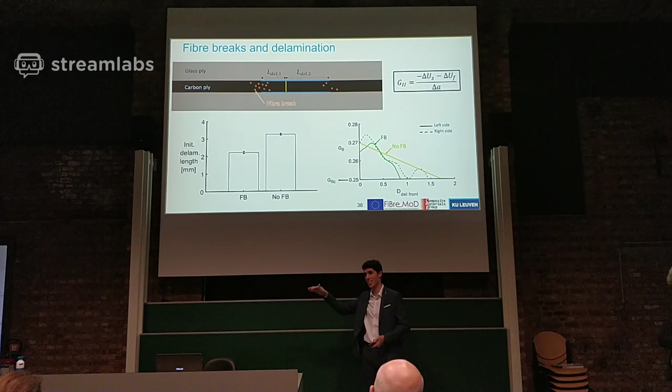Yeah, so using that to our advantage, then we can probably have something even more gradual than the plateau we have - maybe we extend the plateau if we have multiple fiber types. If we have, let's say, three fiber types, and the first plateau happens because the carbon plies are fracturing, then if we have a second type of fiber that will fracture afterwards, we can extend the plateau and continue with the more ductile fiber types. So that could be a way - if we have more fiber types, then maybe we can extend even more this plateau.

So what are the other strategies besides hybridization that could be used to achieve similar goals? Do you think there are other strategies?

Or if you work on fibers, there are scales of design that use similar elements to architecture, not only fiber types of architecture.

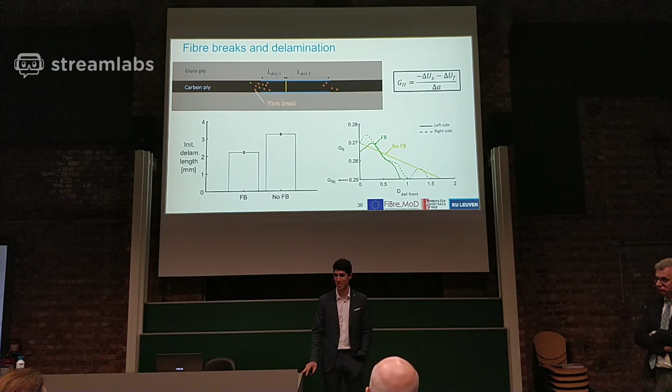Yes, probably looking into bio-inspired approaches. That may be a way to add some ductility to brittle fibers, make them fail gradually as we choose and not as they fail naturally. So yeah, indeed, discontinuous fibers, but controlled discontinuity, not random.

Maybe last question.

I'm sure the stress concentrations work differently if you have this kind of morphology in the fracture surface. So that's something that we would need to start over there. Also, the way the fibers are non-linear in their behavior, something must be adapted to that as well.

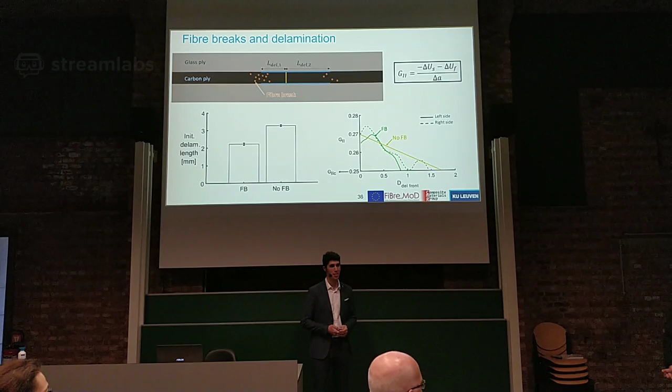So what do you think would change in the cluster formation, for example? Good question. So if the fiber stress concentration changes, how would they change?

Probably they would extend a bit the region where the stress concentrations are applied, because as we've seen with the matrix, if we have more plasticity, then this region of stress concentration increases. So probably these clusters would perhaps be a bit more dispersed versus the coplanar, if you agree with that.

Yeah, I think so too, and that could potentially be interesting, because the coplanar ones that are critical are the most critical. So nobody really knows, I think, but I think it's conceptually quite interesting to try to do that as well.

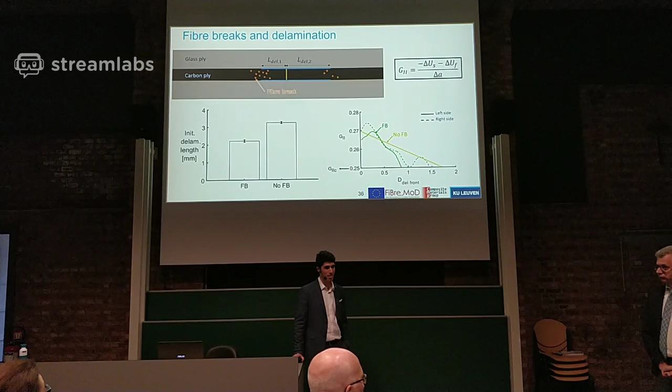And the second question, and my last question, is related to the synchrotron. Now you have done some interesting work on hybrids in the synchrotron, but I think you also realize that there are certain things we wanted to achieve and they didn't really quite get there. So if you had one single experiment you could do in synchrotron for hybrid composites, what would you do differently, and what type of test would you be doing?

Just one test? One test, it can be any test. Tensile? Yeah, I'll stick with the tensile still. But I have an answer for that, and it's related - well, if I can find that.

It's actually, I went straight to the slide. It's related to this hybrid composite here. So when we created it, we thought, okay, we're going to make glass fiber layers here to stop the interaction between the carbon fiber layers. And we didn't really achieve that. Actually they failed - the 3 carbon layers actually failed simultaneously.

So what I would have changed, if I could go again, I would add more glass fibers and see each ply fracturing individually and what would trigger it. So that's what I would do. Okay, thank you very much.

Right, I will also ask a question. I will start with a small story. I was once present at a gathering, a technical gathering of aeronautics people. And there was discussion about admissible stress which they can put in designing a plane. And it all came down to Weibull modulus.

Because in norms for calculation of design strain, it was written M equal 4. And somebody in the audience maintained the position that M should be 60. And this gave an enormous increase of design stress, and then of course enormous economy of just everything, including cost. And then the words the people used, one or another, are not pronounceable in normal audience, so I wouldn't repeat that. So this was a very heated discussion. I was very much surprised to hear that.

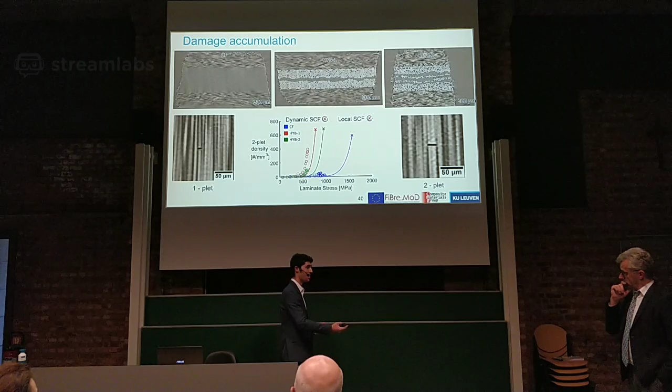I think so, yes. Just by adding local stress concentrations, we've discussed that before. So now, for about a year, or maybe even just a few months, someone actually was able to measure the intrinsic strength of these carbon fibers. Just by using this value and the local stress concentrations, we can already say, okay, if this fiber just in this small region exceeds this value, it will break regardless of having a defect or not. So if we still add the defects on top of it and these local stress concentrations, we get the best of both. Now the problem there is computational time, of course.

But if there is a way to combine the two things, another layer of scale, then yeah, that would be optimal. Concerning the interface, you mean surface flaws or the interface as in debonding? Surface structure, roughness to start with, maybe. So for the local stress concentrations, I don't know exactly how that would play a role, but indeed the surface of the fiber could play a role in debonding.

When the fiber breaks, it will debond from the rest of the matrix, transfer the stress concentrations not to the fracture surface plane, but to another region, and break fibers that are weaker but not exactly there. So yeah, again, that would - I think the more detail we add to these things, the better we will get in general. Yeah, of course, it's always a trade-off with the computation.

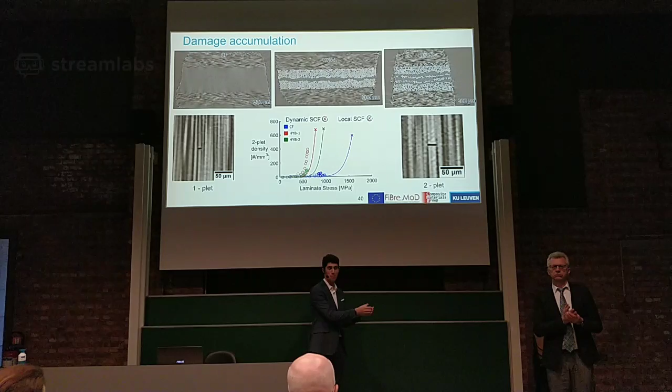Exactly, exactly. Okay, any questions from the audience? I have a curiosity. I saw when you characterize your fibers that some carbon fibers are different diameters. Did you take that into account in the model? Does that play a role if the fibers are smaller? So you mean the scatter of diameter of the fiber? So you mean that this fiber type HS40 was 5 micrometers versus the T700?

I didn't really look too much into that, but I can predict more or less what would happen. If the fiber is bigger, these local stress concentrations play a big role compared to the average stress, because if you average the stress over a bigger fiber, the average stress concentration will be lower. So you would be under predicting the failure of them. As close as if you go to infinitesimally small fibers, I think these stress concentrations will be a bit more accurate. That's my view.

Questions from YouTube? No? If there are no questions left, then thank you very much again, Francisco.

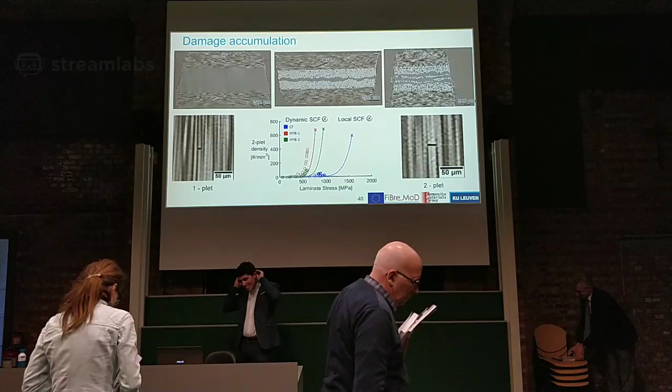I think the presentation is really nice. I don't know if it's because it's more like modeling and more tangible than, for instance, the equations that we have seen you teach, but it was easier.

I just wanted to thank the jury members, which were too good. Thank you guys very much for being here. Thank you, YouTube, thank you people. I think Aula quitted for a few minutes, no? Thank you guys. It's a really big compliment that I only lost you guys slightly recently - that's the biggest compliment you can make during a presentation.

And the questions, some of them were really nice. Emmanuel is congratulating, and Fabio is saying that you are also good looking. People are sending me messages on my phone, and I keep getting messages because my watch is vibrating - it distracts a little. You could have deactivated it, no? Yeah, I can do not disturb. Emmanuel is listening to us, because I told him just like, thank you. So I'm the spokesperson.